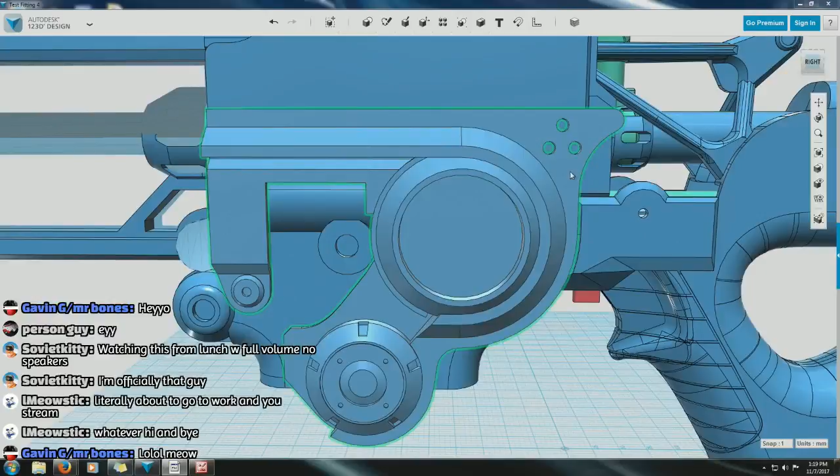If you can tell, I got the thing going in this area-ish, because I forgot that last time. Literally about to go to work and you stream. My bad. Oops. It's currently in the way.

None at all. Middle of dining hall too. Hey everyone! Take a look at Kyle! Everybody look at Kyle! Everybody! Look! Look over here! Hey! This guy on the phone! Hey! Look! Hey! Look over here!

That help at all? So we got some things on the agenda that I'm meaning to do, along with this front piece that we do need to work on. We need to work on some detail inside here, and I would like to make this part a little bit bigger, because if I hide some of these parts you can see that it's a little bit thin on some of these parts, because this isn't even very thick. It's very easy to get lost in the scale. That's only a mil thick, so I think I want to beef this up just a little bit on the outside to give it a little bit more strength.

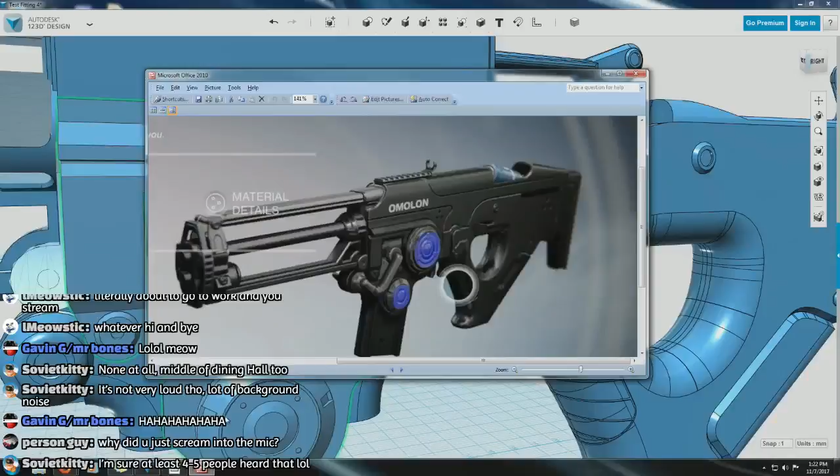But right here, you can see some detail in this, and so I'm just going to use this. Now you can see that it's flush with this ring, just like this one is flush with the ring right here. But I'm going to recess this one a little bit, so that way I can still use it for other things besides Chaos Dogma if I feel like doing that in the future.

Why did I... Oh, that was weird. Sorry, I clicked on something on the other side. I'm sure at least 4 or 5 people heard that.

Yeah, the cover of the Omolon doesn't look great, but if you can see where that cover would go, kind of go over this entire thing and then back here. So that's what I'm looking at. I have the picture on this side of my screen, you guys can't see it, but it doesn't need to be anything super fancy.

But we're going to do it nonetheless. I'm going to try to hide all of this at once, and it might crash my computer. It might actually crash. Trying to hide this many things at once. Wow, look at all that lag.

Oh, my lag. Oh, we're getting to the... I might have to start cutting this thing in half to keep working on it. Oh, you know what? I can't do multiple types at once. It has to be all solids or all sketches in order to have the menu pop up. Or maybe not.

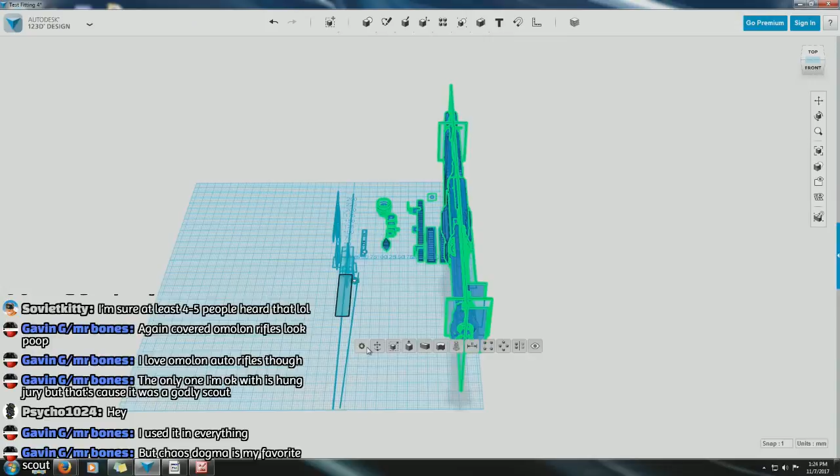Is it going to crash? Oh no, it just hid those. Okay, well that's convenient. Let's go ahead and start hiding some of this crap that we don't need. Give us a little bit better performance maybe.

If I could grab this.

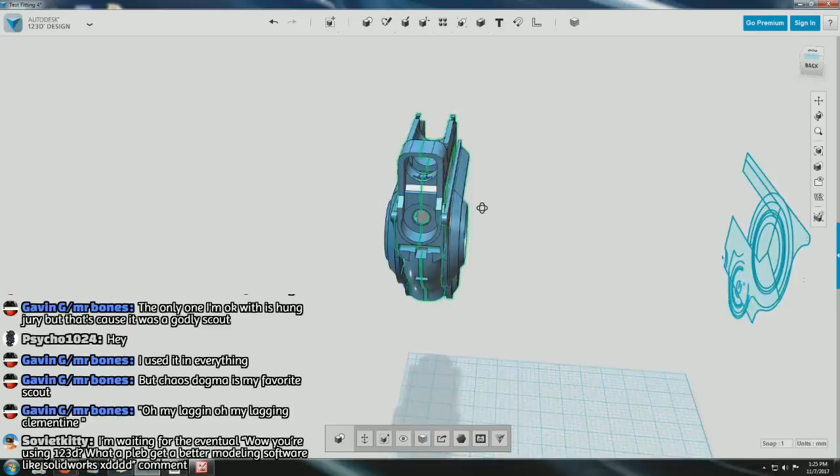Just gonna hide as much of this as I can, so it's going to help with lag just a little bit. It's still there, so it's not perfect, but it's no longer visible, so it's much better than it was.

Now we're going to use this framework, which is the reason why I kept it, so we can easily find the center of this thing right here. I'm not sure how far this is going to go over, but we will measure it. So we'll measure from here to here. 22.2. So grab this again. Move it this way. 22.2. And that should be right on the surface.

Wow, you're using 123 Design. What a pleb? Get better modeling software like SolidWorks. Comment. Yeah.

I do need to get a better software, but I think I can port all this stuff and make it into a step file. But I'm not actually sure. Like, I think I can take this, turn it into an STL, and then import it into one of those programs, and then make it into a step file. I'm hoping, because it would suck to need to do all this again.

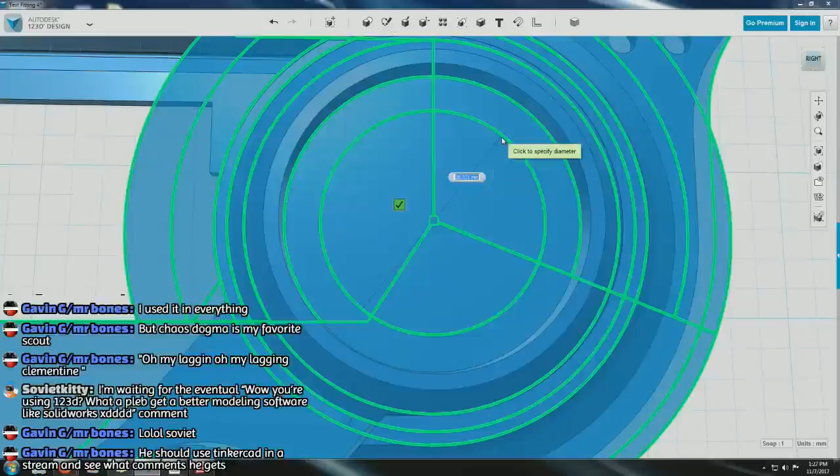Actually, let's make that an actual number. This one is 50 mil. We'll make this one 38. Make the inner one 30. So that's a 4 mil ring.

I think Fusion can convert stuff to step files because the channel uses Fusion 360. I can't totally confirm.

And then it has kind of an inner ring and then a bulb on the inside of here. I'd say that's a little bit thinner. So we'll go 26.

Can you save as a... I can save as an STL. I don't know what an STL PRT is. I've never heard of anything with that many letters on the end. I'm pretty sure you can convert an STL into a step file, because I looked up how to convert it, and there's a bunch of different tutorials of how to transfer STL to a step. So I'm hoping that that would work, but...

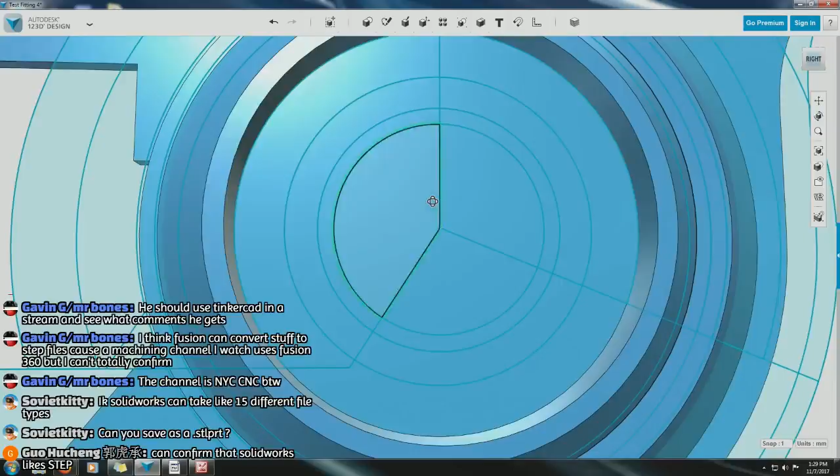I'll do 18 on this one. And then we need a triangle here, and I can cheat by getting my triangle. Actually, I don't even need a triangle. I was gonna do all that, but I only need to make one of them, and then I can rotate it. So never mind, I should need to make one up here.

So we'll make another ring that goes 46 mil out. And something like this. Did it just take a shit? Should I have saved? Okay, let's save.

Hey, Pete, what's going on, man?

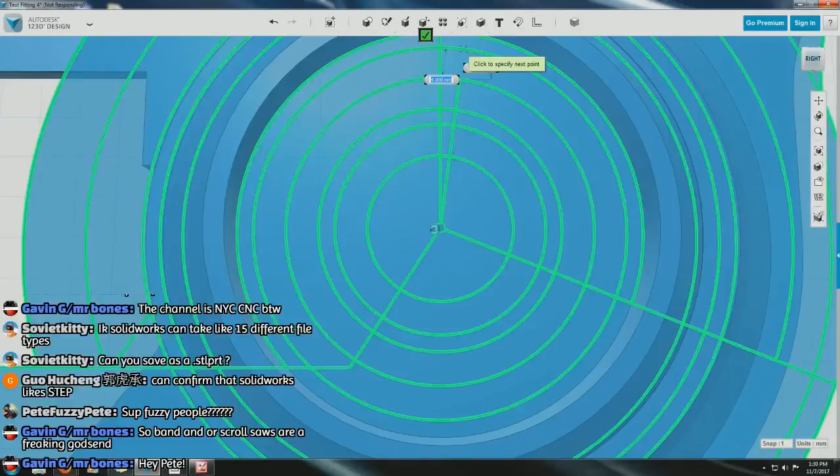So we have a lot of lines here, and it's starting to get a little confusing to the point where I actually missed. But we shall sort through it as much as we can. Wow, why is it so laggy? I would think with how many things I hid, it would be performing a little bit better, but I might be starting to stretch the program a little bit thin. I might have to start removing some things.

So let's go ahead and do this. We will save this. And then we'll save a copy. Should probably move this over here. And we'll just save this to test fitting 5. So now you notice up here that this will change. Is now a completely different document. So now instead of hiding all of this stuff, I'm actually going to full on remove it.

And we'll focus on the front section for this. Trying to think how I'm going to... I was gonna show the sketches, but I'll just leave sketches for now. That's okay. This should not still be here.

I'm starting to get worried, guys. Starting to dip in performance. Hardly working. It could also be the fact that I'm running like 3 or 4 other labor-intensive programs on my other monitor. It could very well be an issue.

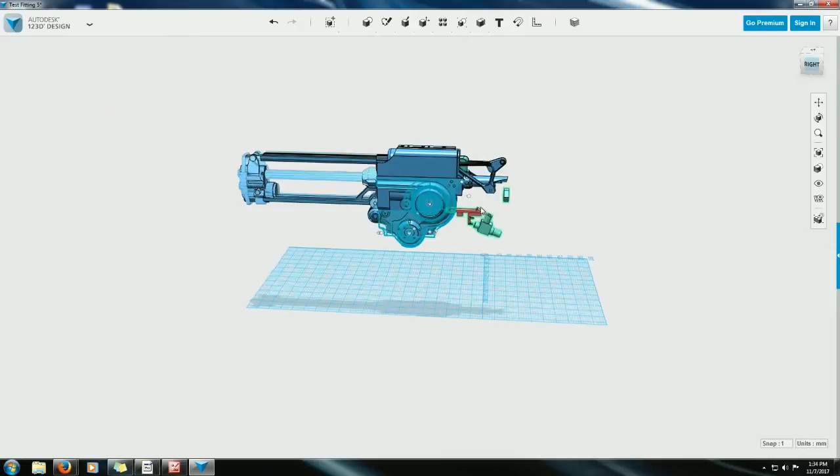See how when I'm grabbing this, all of these lines are disappearing? That's not good. That means it's starting to stretch the boundaries of what this program can do. Now I know for a fact if I delete too many of these things at one time, it will crash. I know for a fact. So we'll only grab a few at a time, and hopefully nothing will die.

Gonna go take it nice and slow. I bet these sketches are the thing that's making my program lag. I bet it's not even the solids.

Okay, we're on a new program here, so we should be good to save. I'm just paranoid. Okay.

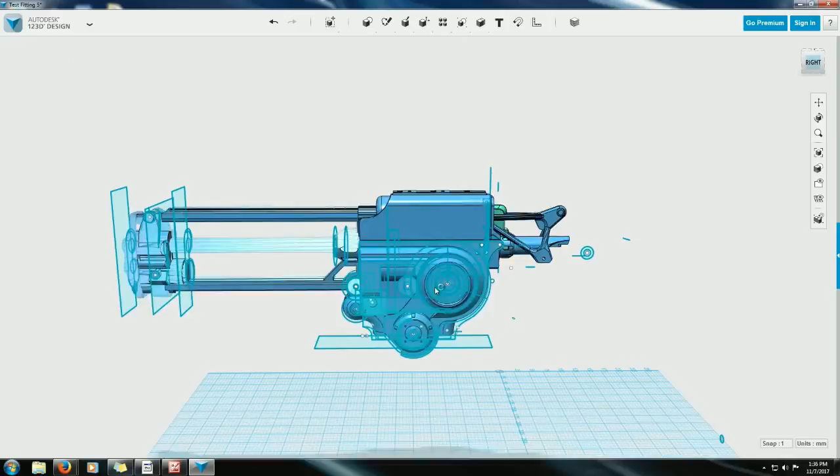That's what I'm trying to do, Gavin. Just trying to imagine this when it's done.

Let's go ahead and move this a ways. 100, okay, that's 100 millimeters is not as much as I thought that was going to be. Let's move that a little bit further than that.

Yes, no, maybe. Come on, freaking lag is unreal. Why is it lagging so much? It should not be lagging this much.

Let's do an even 500. Then we'll come back in here, grab all of this except for that one right here. And then grabby, and the menu pops up, hide, and that should keep the solids there.

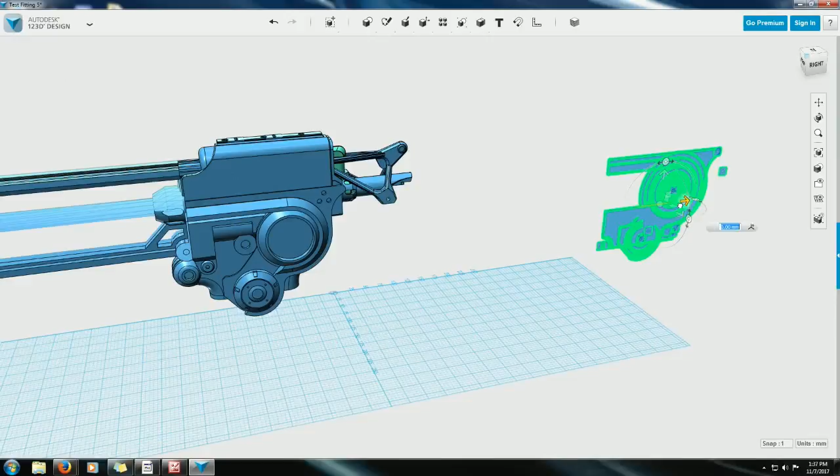And it's still kind of lagging. That's concerning. It is mildly concerning, that's mildly concerning that that's still lagging that much. I hope I don't have some sort of artifact. That should not be lagging as much as it is.

Okay, back to it, let's try to focus on what we're doing. So we're going to trim some of this stuff that we don't need, just to kind of clean everything up.

Still need those. Say 5 mil, that's way too much.

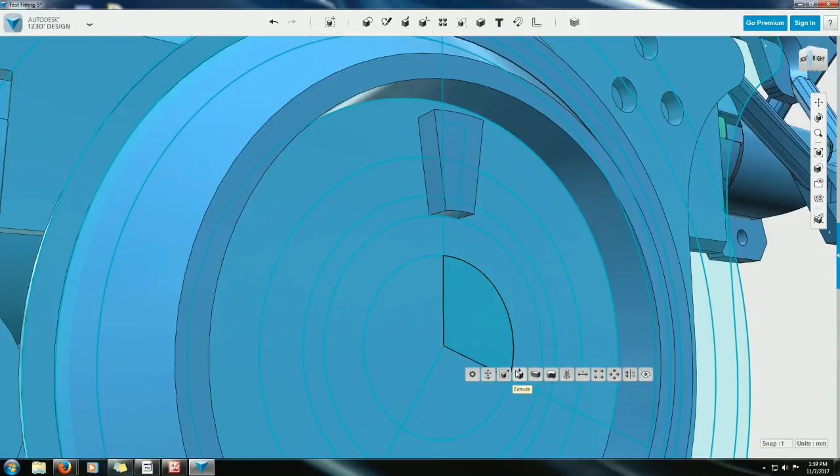And we're going to mirror this object. And then we will take one of these, extrude it, make it a new object. This one doesn't matter as long as it's connected to the center. Oh, I'm an idiot. And then make an axis right here.

Delete this. Circle pattern of this, rotate around this axis, and bam, we have 3 perfectly placed triangles. Or 3 perfectly placed things in triangle form. So that's going to take care of that.

And then we have this ring. Phase inside of here, so I can grab this and that. And pull that out 2 mil. Does that look about right?

Yeah. And then just for workability's sake, we'll make that a new solid. And then we have this ring right here. It's gonna pop out a little bit for...

Oh my dear lord, it just crashed again. I don't know if I'm here or there or anywhere. Nope, this one actually crashed. I'm actually gonna lose my freaking brain.

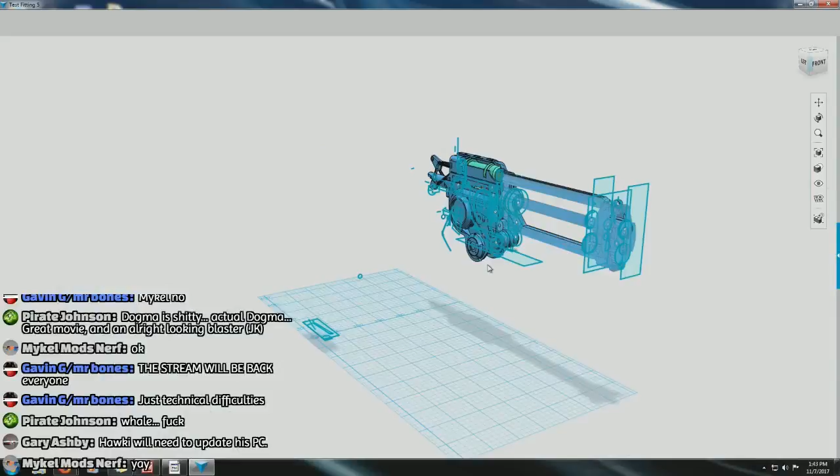Okay, are we back? I'm going to freaking lose my freaking brain. I am going to lose my absolute mind.

It's not my PC, Gary. It's NVIDIA's drivers, there's absolutely nothing I can do. I've tried to fix them. NVIDIA's drivers keep crashing, and while they keep crashing, unfortunately, it crashes my program.

Now we're gonna have to do all of that freaking again. So what did I do?

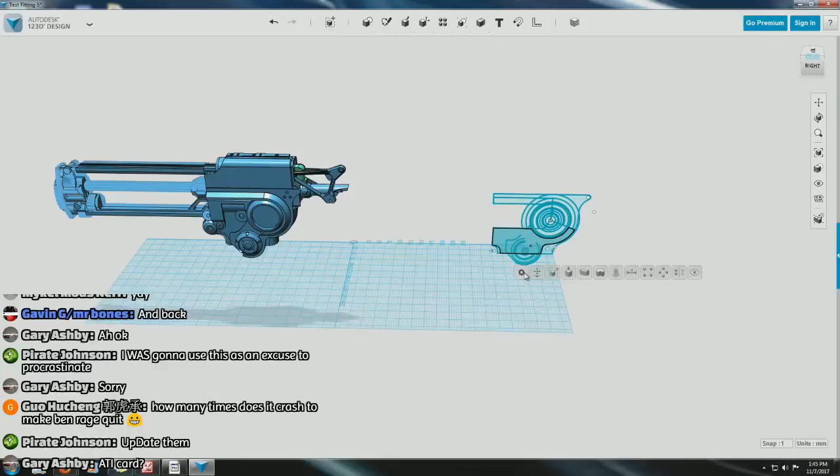This thing is gonna drive me nuts, man. This is just ridiculous. I might not be able to live stream these for the sake of it keeps crashing my driver. We'll see how this goes.

Look at this lag, like I've never had this type of lag with this program before. Like, it's laggy, sure, especially when it gets to the higher polygons, but for how much stuff I've deleted, it should not be this laggy. It should not be nearly this bad.

Save every 5 seconds. They are updated, Johnson. Should freaking unupdate the drivers. Whatever, for now we'll just have to deal with Rage Quit Ben.

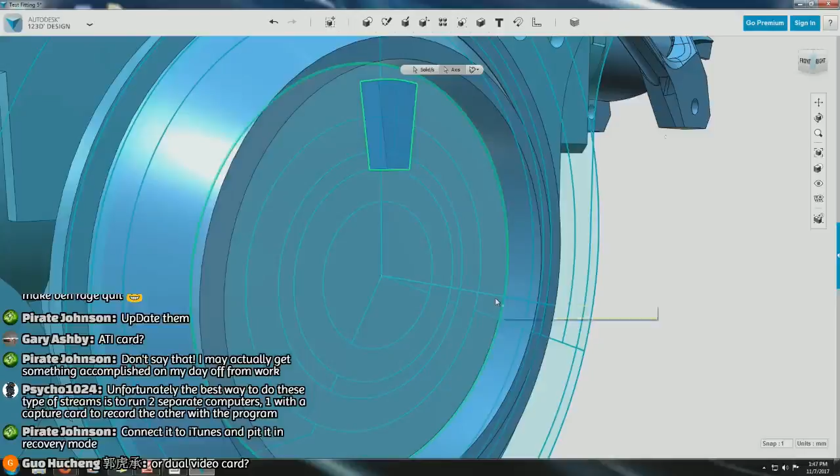New solid. Axis again. Sorry you guys have to watch this whole stream twice apparently. Why is it selecting that?

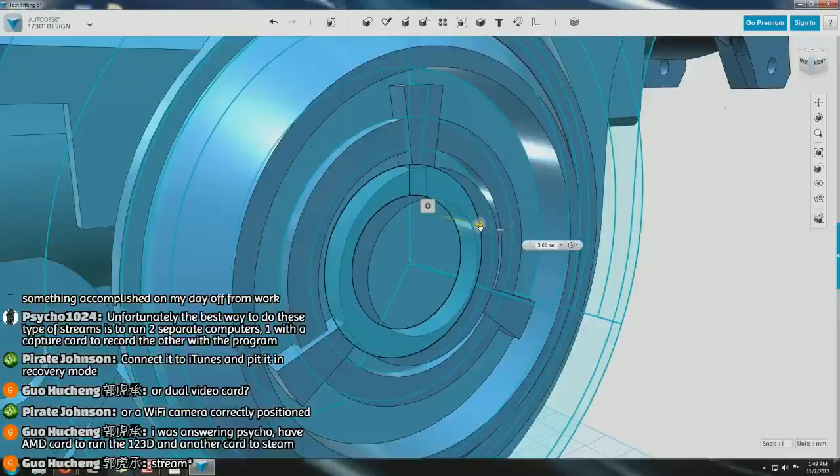Comes out 2mm, and we're going to make that a new solid.

And I'm not getting another freaking graphics card when I could just get the actual program for cheaper.

I don't think we determined how much I'm going to pull this out, actually. This one comes out a little bit more. Maybe like 4mm. Well, yeah. I'll do that, yeah, that works.

Oh, you're answering him, okay. I want to drop the whole thing, get a better thing.

Did I make that a same solid, or did I make that a new solid? I made that a new one, didn't I? Did that make a freaking line? Ugh! How much was that, 4mm?

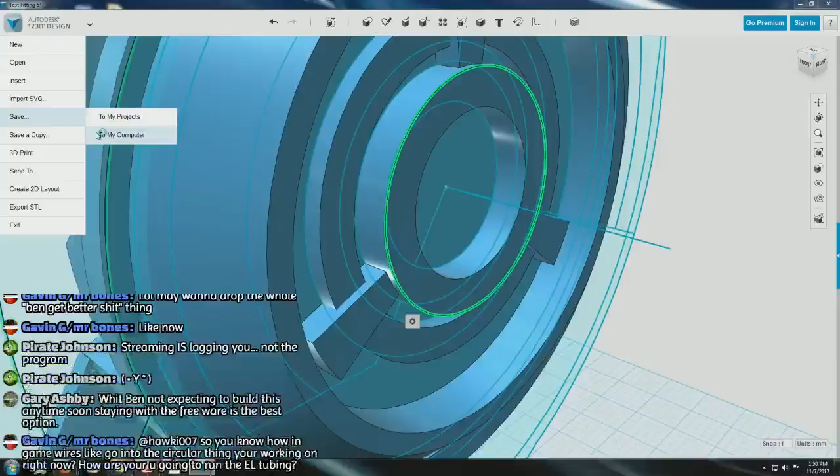See, this should not be lagging right now, not in the slightest. I have nothing on the freaking screen. That's what's pissing me off.

Okay, so we need a bevel right here. Save that first. And that looks about good.

Not sure if this is actually going to come out the way I want it to. No, didn't think so. How am I going to do this? I guess I could just put a bevel on all of these, like that.

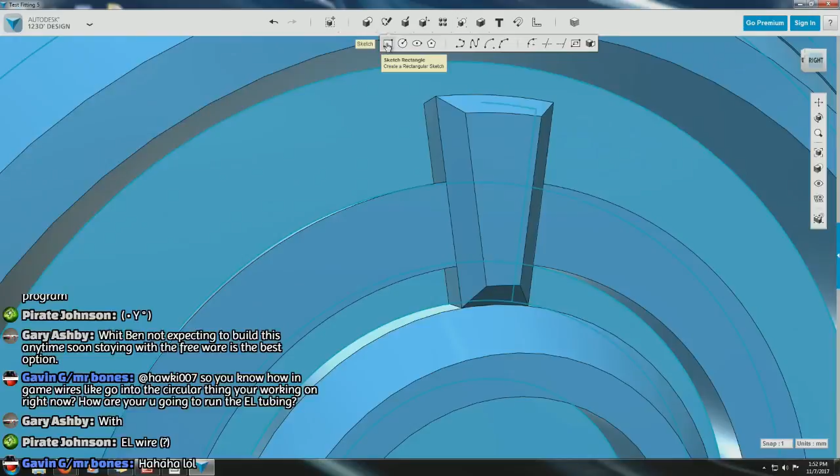Behind the game wires, go into the circular thing we're working on. How are you going to run EL wire tubing? I'm literally going to drill holes in the side of this thing. Because that's going to be something better suited to figure out in real life, so I'm just going to drill holes in the side of this thing when I feed the EL wire through.

How do I want to do this?

Yes? No? Maybe? Really? Oh, I swear to God, if it crashes again, I quit. Okay, why was it looking like it just froze there for a second? Okay. Whatever, whatever, I'm just gonna freaking...

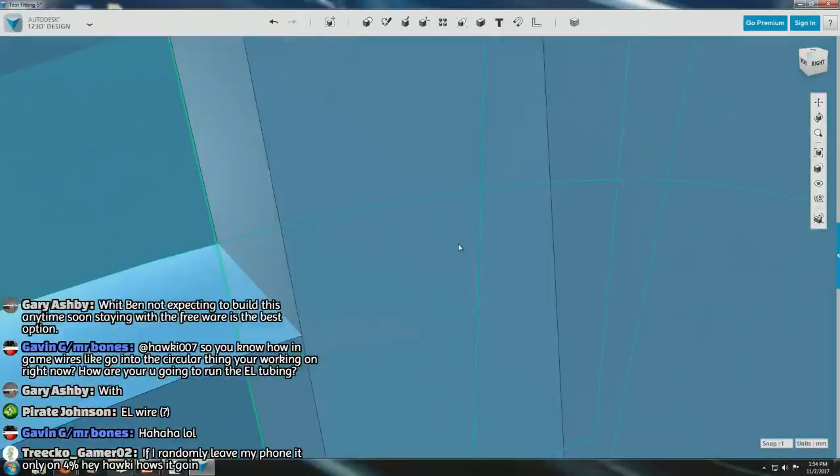Let's... I guess it doesn't really matter. We'll just do 1.75 by 4. So let's do 5.

Oh my lord, I don't know how much more patience I can have for this. Okay, that's too wide. I don't know how much more I can take this. This is stupid, it's pissing me off how much this is lagging.

It's 5. We'll just do 1.

What? Oh, I grabbed the wrong piece. It's like, what's going on? I'll just bring this forward 3 mil.

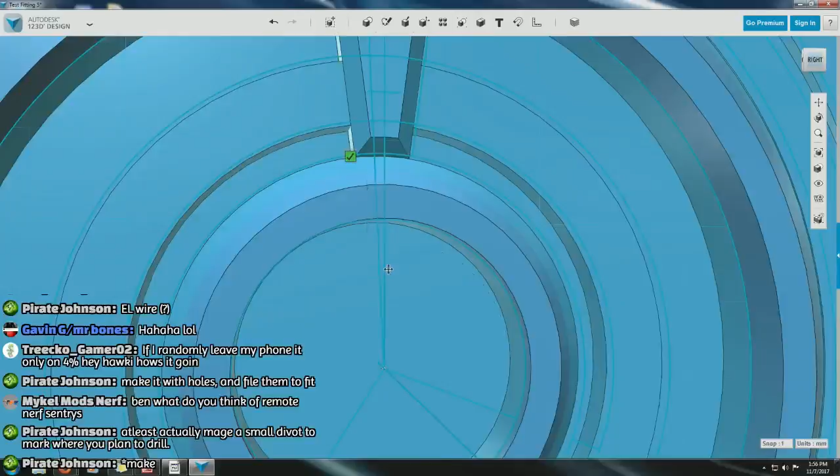We'll do 4 mil here. So we'll go 4 by 2. Do I want that straight on, or do I want it actually to the center? I think I want it to the center.

What do you think of remote nerf sentries? I mean, complicated. I don't know if I've ever seen a really nice one. They're all kind of like, you know, tinker with them, but not really have any real applications, you know what I mean?

At least make a small divot to mark where you plan to drill. Oh, divot. No, like, I don't know where these wires are going to go until I actually start, so there's no point.

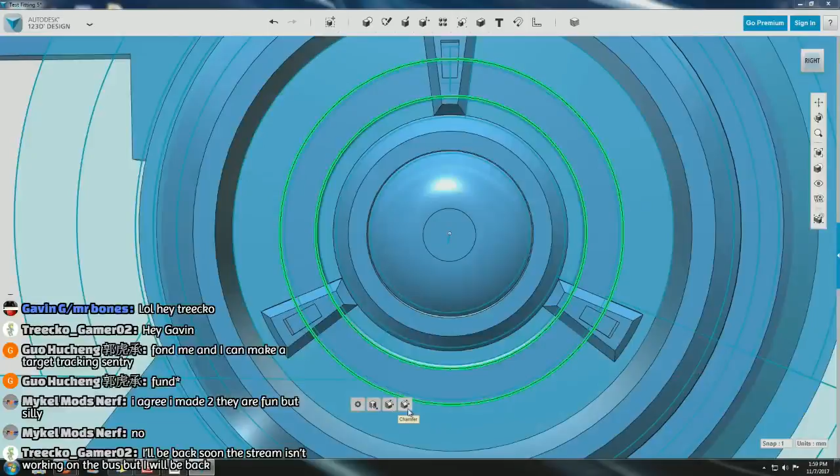Whoa, whoa. Now we can duplicate this.

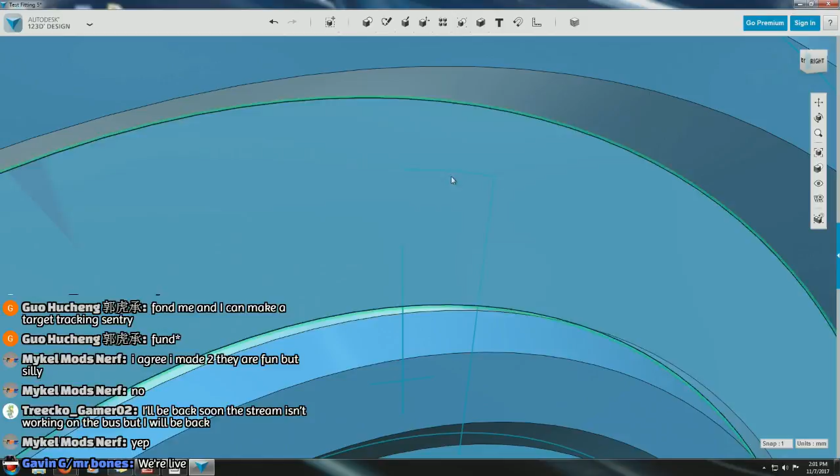I don't suppose I can reload just this. No, it's alright, I don't need to see.

So, yeah, this is going to be a chore.

Let's see. I want to do... what do I want to do? What do I want to do? Let's get rid of that. Go all the way up, I think.

Should not have done this. What I'm gonna do is, from the bottom here, measure out 2 mil.

Nope. Well, 1.5, that's good. And then we'll drag it down so that we make contact here.

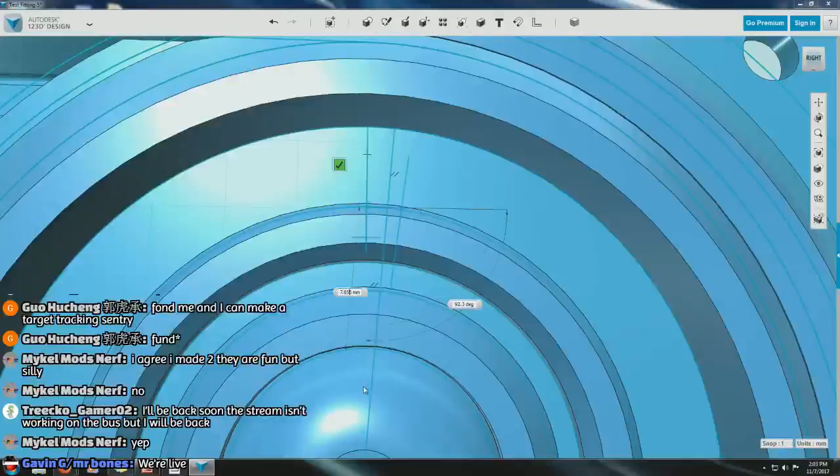Let's back up and take a look. You'll see what I'm doing in a sec. Yeah, that's a little thicker than I want. That should have auto-corrected to the middle.

That's better. So now we're going to stress the absolute crud out of our machine here. Extend that 2 mil and accidentally make it a part of the same thing. Extend this more than 2 mil. If I can find the right tool, extend this 2 mil and then make it a new solid. Grab the block and move it back 1 mil so it's 1 millimeter sunk in there.

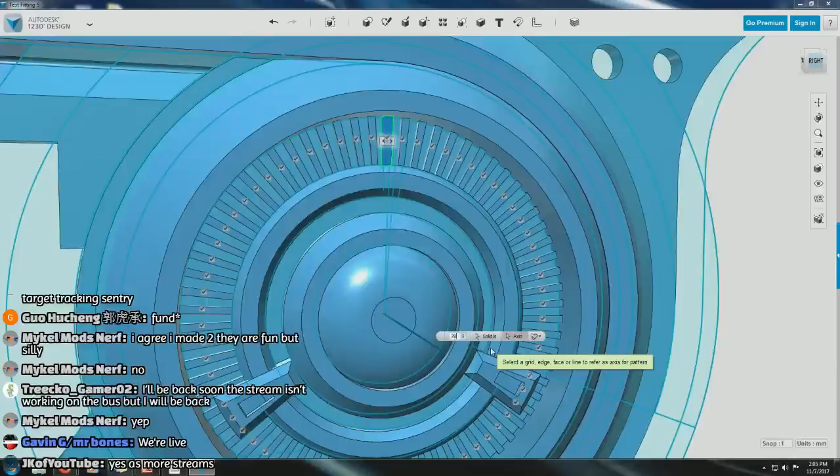Now we're going to save it because this is inevitably going to crash 74,000 times before I'm able to accomplish my task. Instead of 3 times, we're going to try, let's say, 20... up to 80. That looks about right. Oh, please don't kill me. Okay.

Now I have the unfortunate task of needing to cut out every single one of these. So let's go ahead and hide these objects because I don't need any more distractions than I already have. I believe that is all that I wanted to accomplish, so I'm going to go ahead and hide the sketch. We'll just leave that. Now I need to save, so I don't have to do that all again.

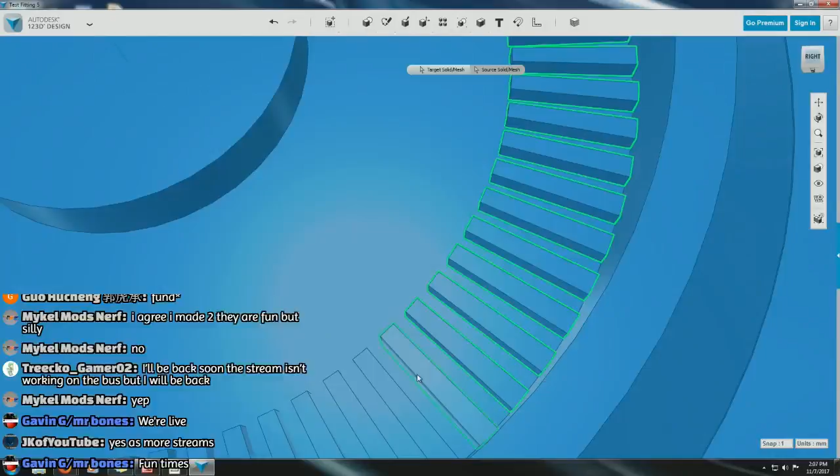And now I need to subtract, and click on every single one of these 80 vents. We're going to be here a minute, guys. And if I miss, I might have to start over again.

Just about halfway done. I wonder if this is going to crash.

Enter. Quick, save it.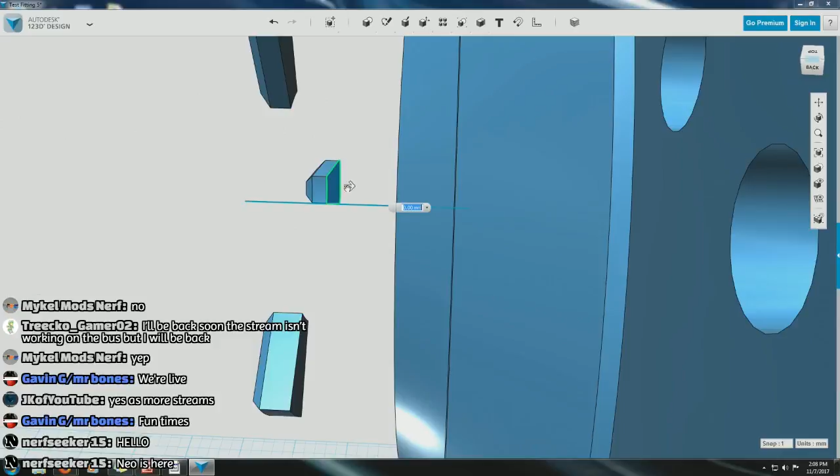I'm gonna grab these. Move them up just a little bit. And then extrude them backwards by 1 millimeter so it fills in the vent behind it. Otherwise there's going to be an empty space behind here, and that can lead to issues.

Move them back 18 millimeters. And then that should, see how that's now filling in back here? It's just what we want.

Okay, now I think we're good to merge all that together. Let's go ahead and save it one more time. Before we do anything, save, save, save, because crash, crash, crash.

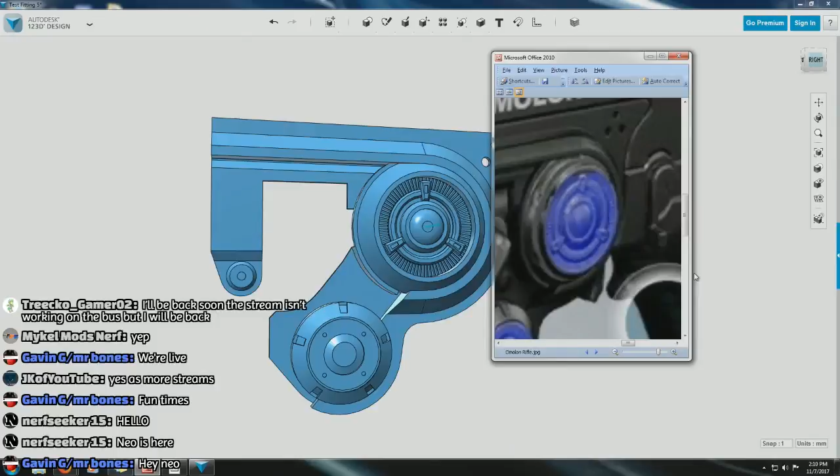And that's all one piece. And that makes that a little bit more interesting to look at. Whoops, forgot this was here. What?

So we have this piece, and that's my rendition of that. What do you guys think? Is it close enough? Then we got this lower one here that I've already done.

Stretch a little bit. And of course, in the video game, all of this is just flat, and then they just paste the texture on there, which is why I have to go in and manually make all this stuff.

That looks pretty snazzy. Pretty happy with that. And so for Chaos Dogma, I'll just blacken all of this and kind of weather it a little bit, junk it up a little bit, but this leaves it flexible enough where if I want to make something else, I still have the correct pattern in there.

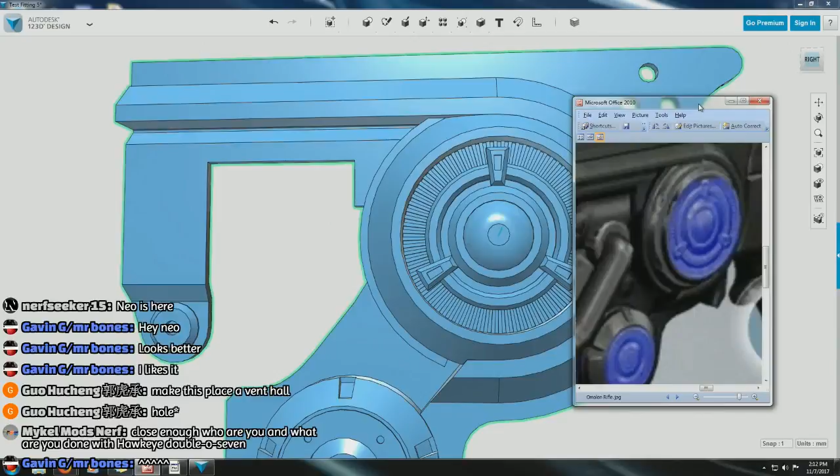Make this place a vent hole? What? Close enough. Who are you and what have you done with Hawkeye 007? Oh, close enough. I mean, that's pretty damn close. Right?

Maybe bevel on the inside of here now that I'm looking at the design. I think I want to take some liberties and bevel on the inside of here. Nah, screw it, it's going to take too much work. I'm going to have to do it to all of them because I already pasted them all in there. Screw it. Screw that and screw you.

So now, hide this piece. We're going to straight up delete this piece. Delete. And then we will save and mirror this side, and we'll use this plane. And we've got two. Look at that. That was easy.

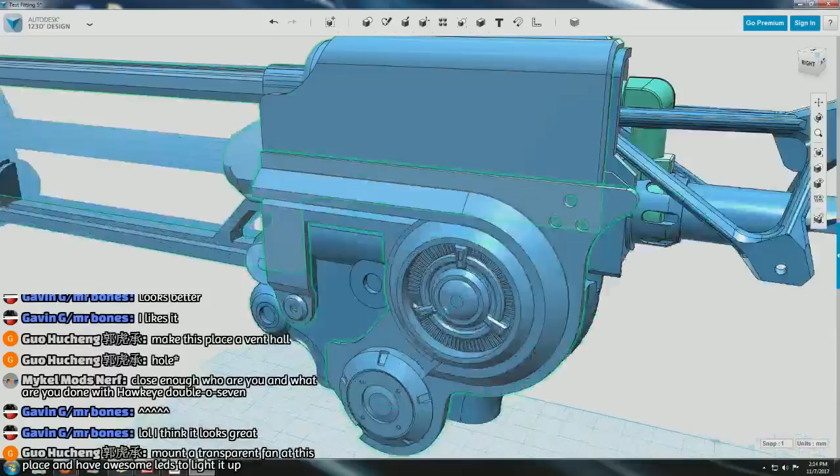Really wish this thing would screw off. And I think we're good for now on there. So I need to beef up this, which I might do next. Mount a transparent fan on this place and have awesome LEDs to light it up.

Why is it in, oh, because there's a little thing right there. Let's just delete this. Don't feel like dealing with it.

So, we need to beef up this part a little bit. Get some meat on the bones. Shouldn't be too difficult, we'll just grab some of these. Well, first of all, we need to delete one side of this because it's exactly the same. So we'll just delete that and then duplicate it again when we need to.

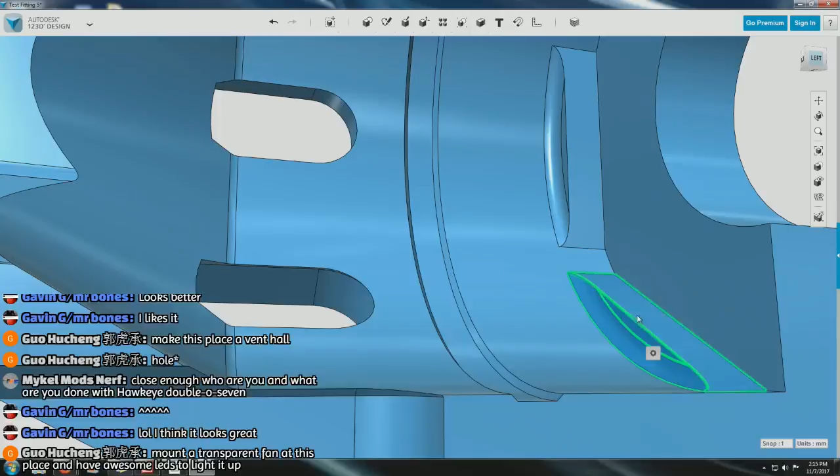Grab that. And now we literally have thicker walls. These should be about 2.5 mil now. It's about 2.5.

And we will open up some of these because this is bound to not be super 100% precise exact down to the exact millimeter. That's just bound to happen. So we'll grab all of the inside walls. I doubt this is going to go our first run. It's going to be like, I can't do this, which I'm totally expecting, but might as well try.

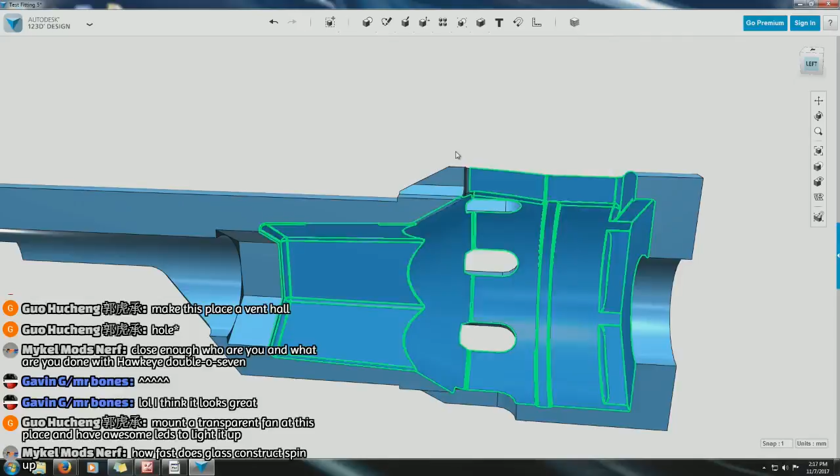Just grabbing. Oops.

Again, seriously doubt... yeah, it didn't even work. Oh, why is it 175? Yeah, I didn't think that was gonna let me do that. It's not gonna let me do that at all. Forgot right here, but I don't think that would have made a difference.

How fast does glass construct spin up? I mean, it has 180, so... as fast as 180s.

How am I gonna do this? Gotta think a little bit here. Where's my actual... hold on, let me get my actual part. I'll be right back.

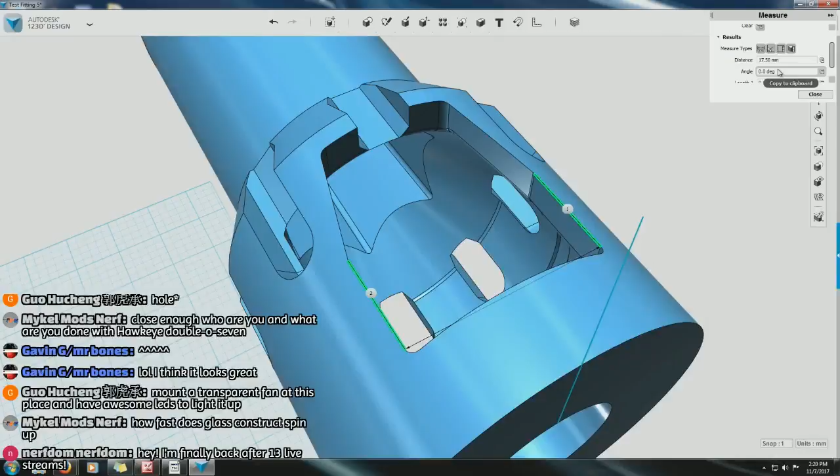Let's go ahead and make a line right here. We'll duplicate. And then measure, measure here to here.

1750, what did I say that was? 17.6, that's what this is looking like. See, that's what I'm worried about. Then again, I could also file these parts to fit and kind of sand them down. Oh, what a predicament.

This is a small enough piece where I guess I could just print this from Shapeways or something. I guess it's not that big of a deal.

So we made that line there because that was going to fuse the parts together, and we'll split these up using that. At the very least, we beefed it up a little bit.

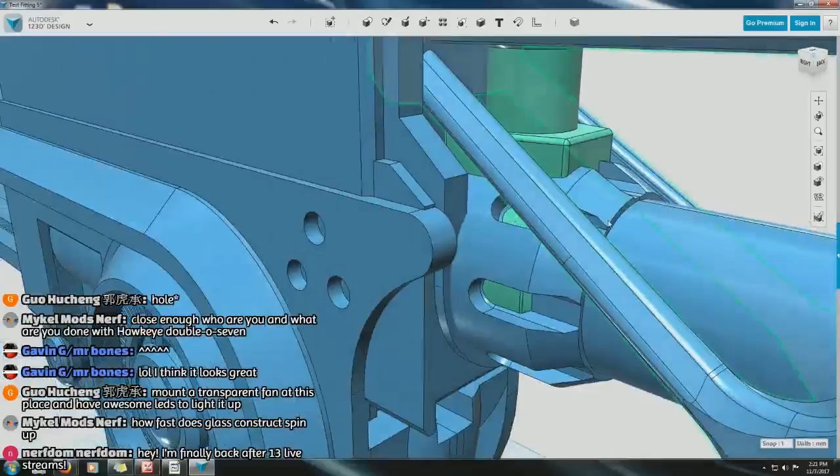The hell's that? What is that line? Right here. Wait, what? Oh, that's the other piece. I thought I deleted that. Apparently I just hid it. Okay, that was a little confusing. Okay, that was very confusing for a second.

So we'll duplicate these, copy, paste, and then subtract, and subtract. Now those parts fit in there.

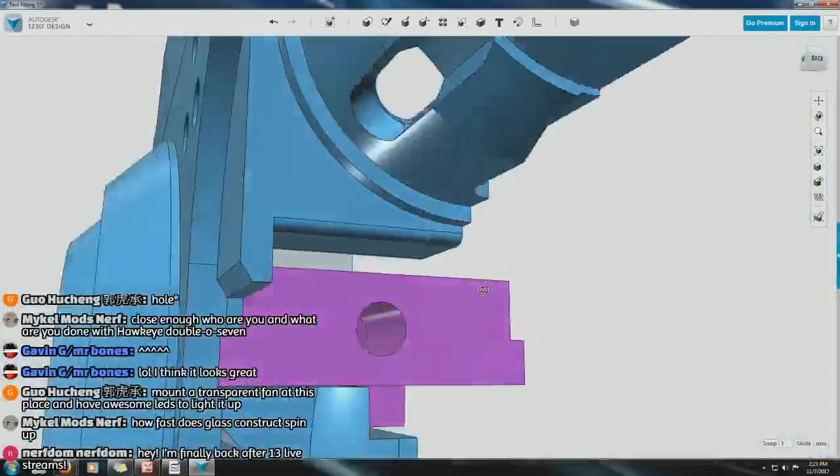Ah, shit. It's a little thin right there. Oh, it's still a millimeter. That's alright.

We'll eventually have to import this into the other model and delete the front, and get this part to make sure it's fitting on the other side, but we'll do that all in good time.

So yeah, this is where the mag would go. That is where the trigger goes.

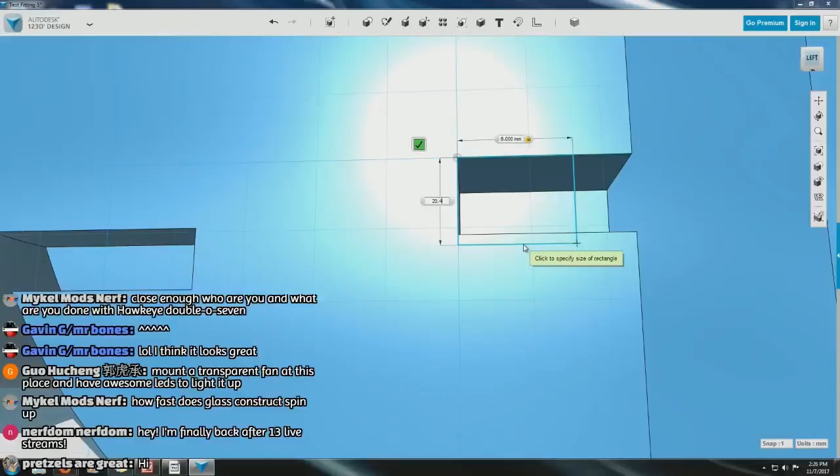Now we'll measure this and see if we can't replicate it. Where do we want to start? Guess we'll start here, if it would let me.

So I'm just going to be going back and forth with a pair of calipers and measuring this back and forth here. So that's 8 mil. And this way is 20.4.

So already I should move this over a little bit. I mean, I guess I need to fine adjust it afterwards anyway, so there's no point in doing that.

You know what, this is actually upside down. I just realized that that's upside down. I wonder if I could use this upside down. Oh no, wait, because no, that doesn't work. So it'd be going like this.

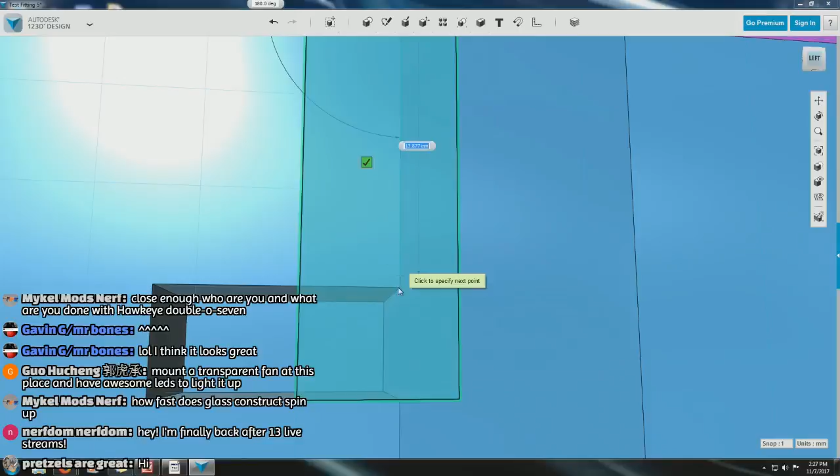So this wall right here is 30.6, or whoa, 30.6? 3.6, excuse me.

Wow, did I just get that on the wall? I mean, that's not where it's supposed to be, but...

And then this one is 4.7. So I'll just go all the way down here. And then, oh, we still have this. Then come back up, 4.7. And then, what am I doing?

Sorry, just lost my train of thought.

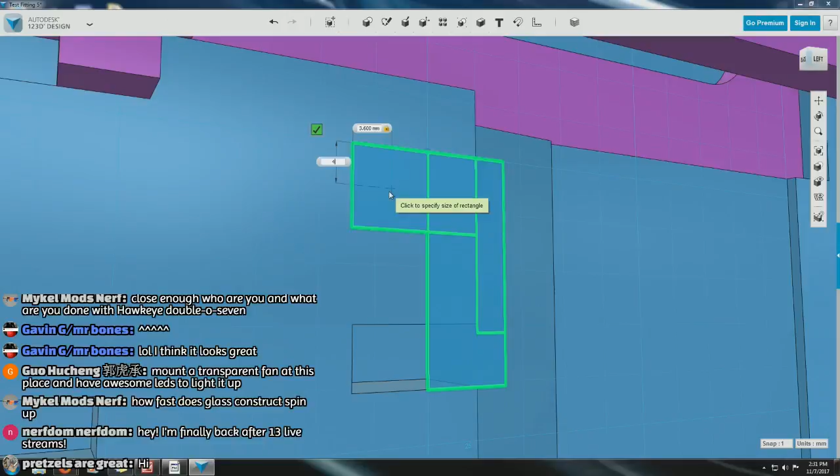So 5.1, that would be less than that. So it'd be 3.6 in this direction. So that would be 3.6.

And then this one, double checking. It's like 3.6, maybe 3.5, or excuse me, 5.5, I'm an idiot. So that'd be 4. That should be where that goes. And this is 3.

Just clean that up a little. Oh, and then I guess we need the thickness. It's about 10 mil.

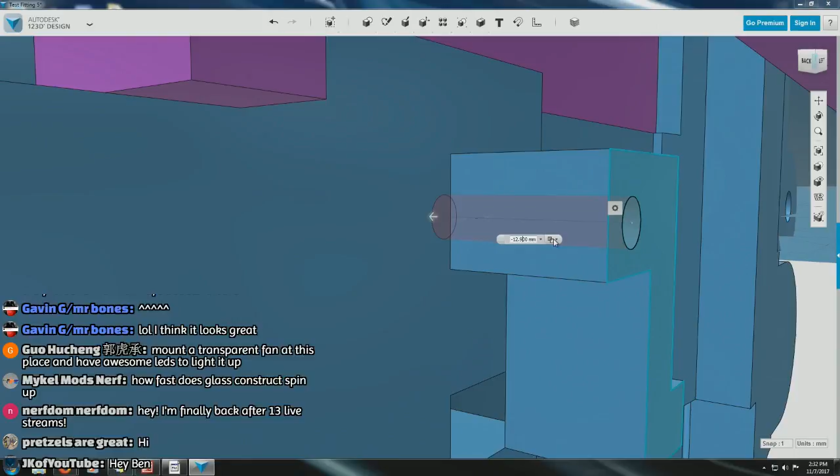What side is this on? Probably figure out what the height is on the peg.

Hey JK, what's going on, man? Kind of a quiet stream. I think people are dead, but that's okay.

So that's 12.9. So here we're going to put 12.9 to a new solid. Gonna go ahead and I think we'll just go ahead and delete that. Merge.

And we'll make this a different color. Let's go with - do we have yellow already? I feel like we have yellow already somewhere. Can't remember, I'll just make it yellow for now. And there's a bit of a slope on the end of this, but I'll just guess that because it's not that important. It's about that.

So that is the approximate space of a Stryfe mag release. So if I was going to use that, where does this even go in the shell? Does it center up?

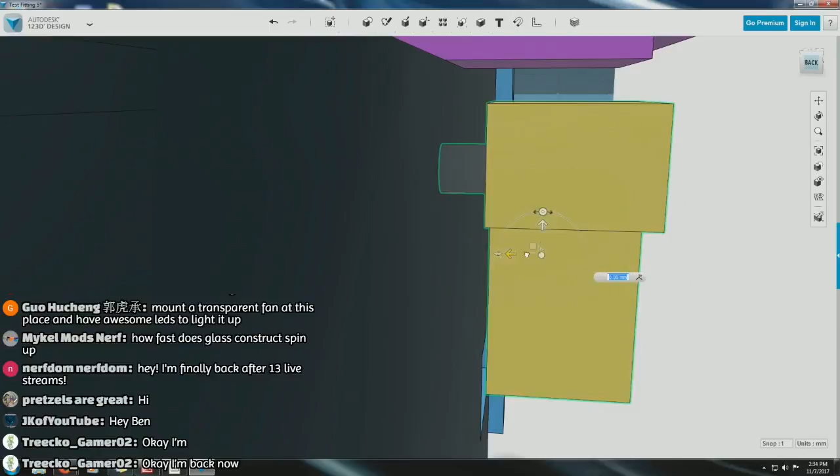I'm not even sure if that centers up. It doesn't actually center, which is interesting. It's kind of with the center of the peg, or center including the peg, which is interesting.

So what's the center of 12.9 divided by 2 will be 6.45. So if we pull this out, um,

2.9, and then we'll push it back in a total of 6.45.

That should be about where we want it. Not center, but that's where it is on the Stryfe. So we're just gonna trust it.

Welcome back, Treecko. I think we're kind of dead here, but that's okay.

How is that even possible? That can't be right, that's not right. I'm missing something. I think I messed up someplace, and I think I know where.

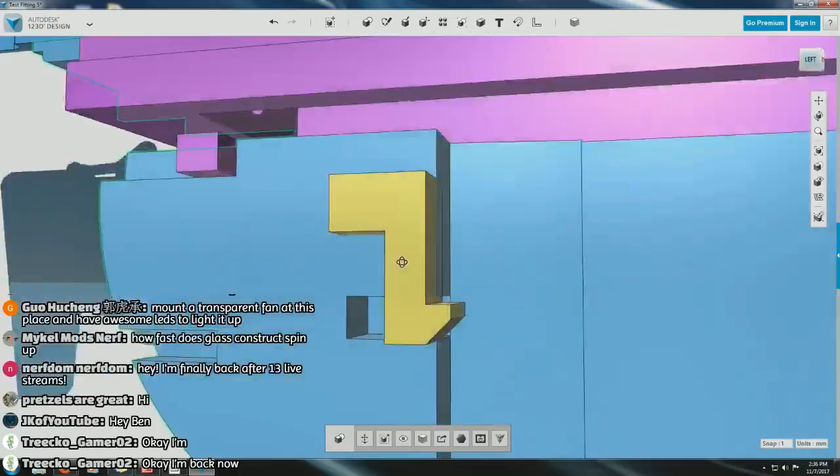Yep, that needs another 1.3 mil added to it. How did I screw that up? Should be 8 mil from front to back there. That is 8 mil, so what the hell? Did I screw up the thickness here?

It's about 3.5. How did I get 5 mil out of that? What the heck? It's like 3.55 actually.

Oh, freaking balls, man, that might not be good. I might have to move this and then extend this because I have the pin right here.

So let's measure this to here. It's 12.1, that's correct. So this was 3.55.

Five, 1.45. Why is there a freaking line there? Why is it still in measuring? Negative 1.45, whoops.

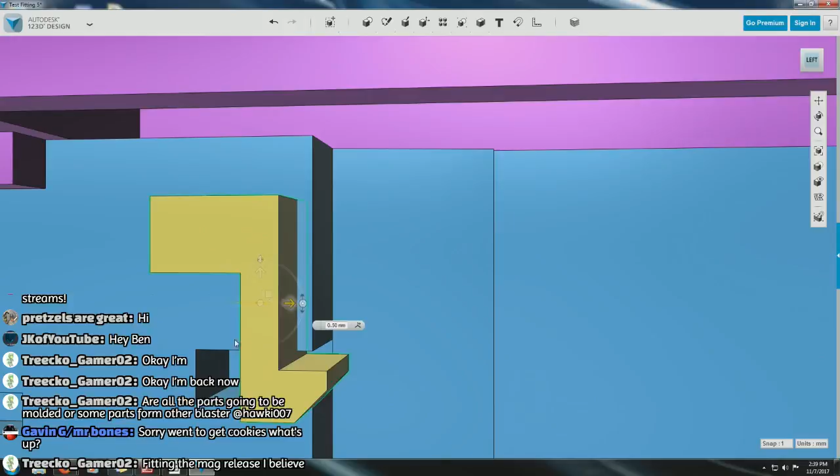That looks much better, that looks much more accurate. How thick is the wall that holds it in is the real question. So opening the Stryfe and actually measuring the wall thickness here. It's like 1.5.

So move that another half mil closer. It's kind of thin, but we'll manage. So that should be the placement of that. It's gonna need a custom mag release for sure, but I guess that was expected. As long as it doesn't interfere with anything.

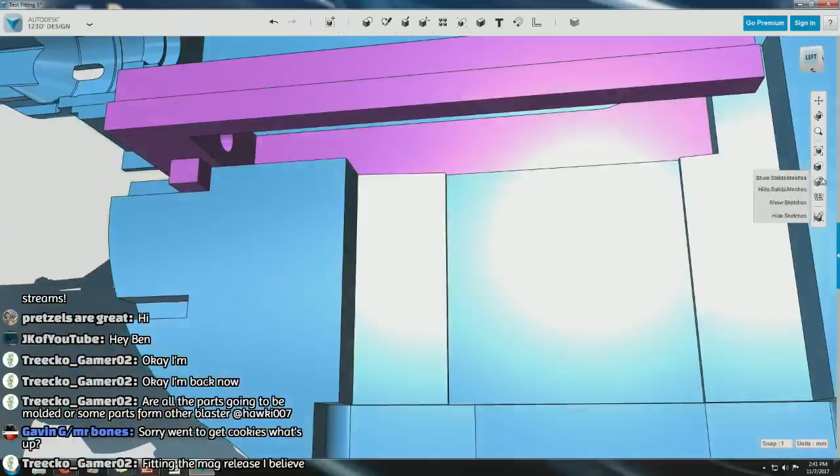That's not good. That might be artifacted. That should be merging together. That's not good.

Hopefully that fixed it.

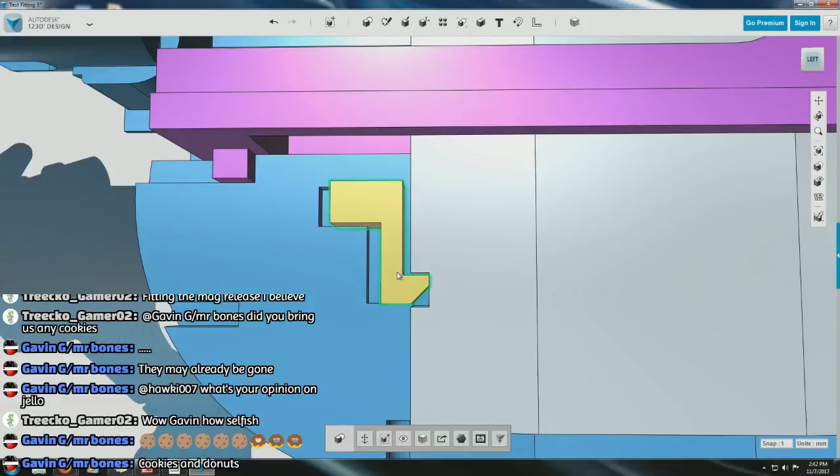Yeah, where are cookies? Wow. Can't believe you didn't bring us cookies. How selfish. Cookies and donuts? Sounds super, super healthy.

Slowly losing the will to live is a fact. That I am slowly losing the will to live.

Wonder how long an artifact, or not an artifact, a Worker mag release is. Probably come down to about here, I would think, like right outside where I need it to be.

Probably gonna have my own printed off of Shapeways.

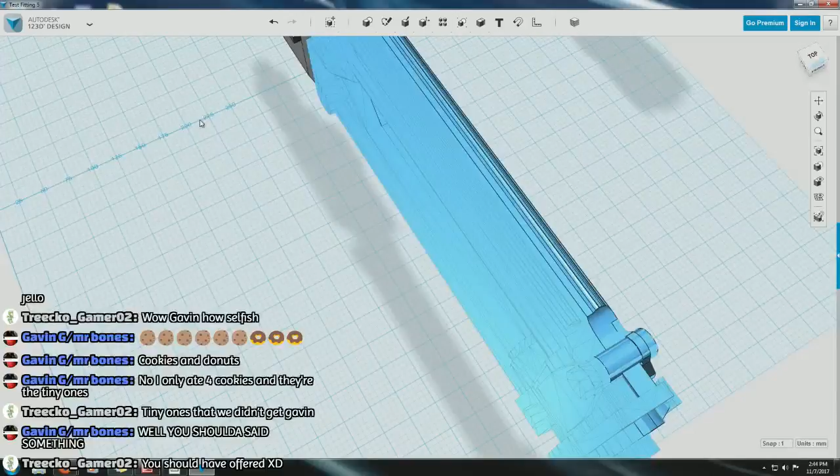Let's start working up here. Okay.

Fine, doesn't want to center up? I'll use something else. Damn.

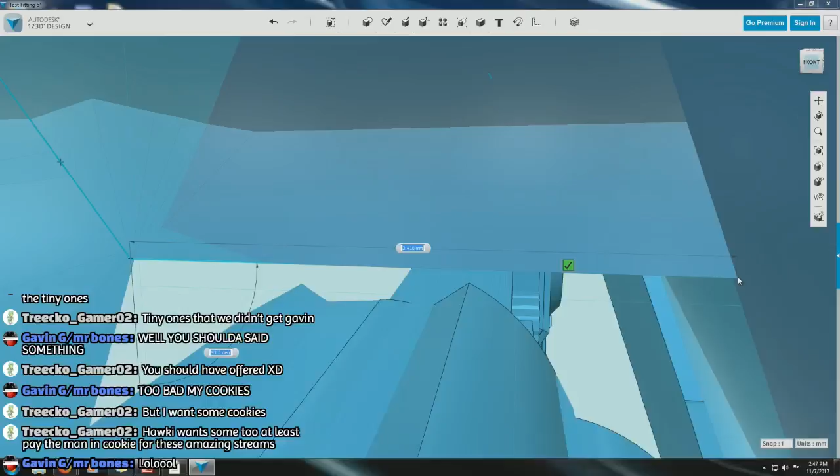Okay, now we have a bit of a guide that we can go off of. Can't see a thing. Where am I? What's going on? That's actually pretty darn close already. See how easy that is? No trouble at all.

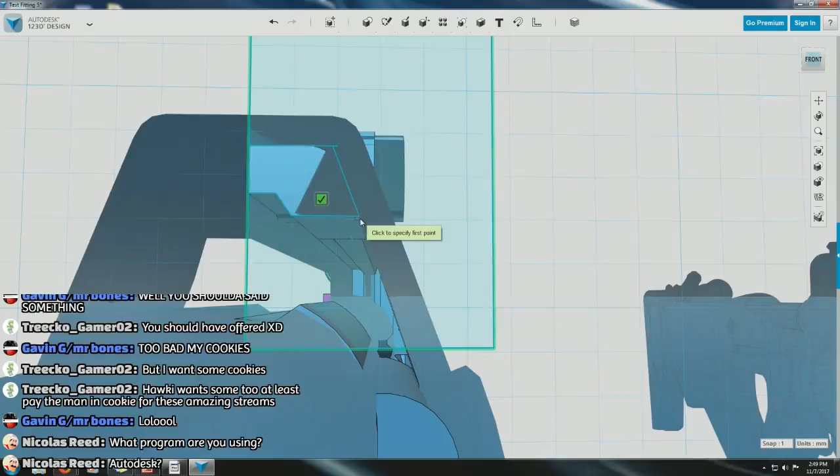This is 123D Design. It's a free program, not very powerful, but it's free, and it's what I have right now. You can tell we're doing a good job because you see that little underhang right here matches up with this thing. So that's good. It's kind of intricate down here, but we're figuring it out.

Just kind of quietly modeling, not really worrying about anything right now, so... Whoops.

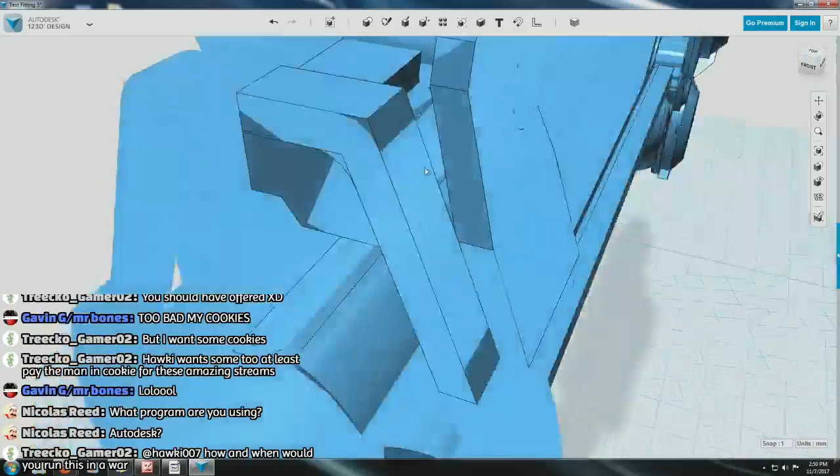How and when would you run this in a war? If I ran it in a war, it would be at an ultra stock event at an NIC grade war. If I ran it.

Screw it, I'm just gonna delete that. Probably gonna regret it later, but whatever. Whoops, didn't mean to do that. I believe that was 4.15.

Look at that, nicely lined up. This is already getting like 250 feet per second, or it's going to get around 250 feet per second with 80 psi. So let's not go up that high.

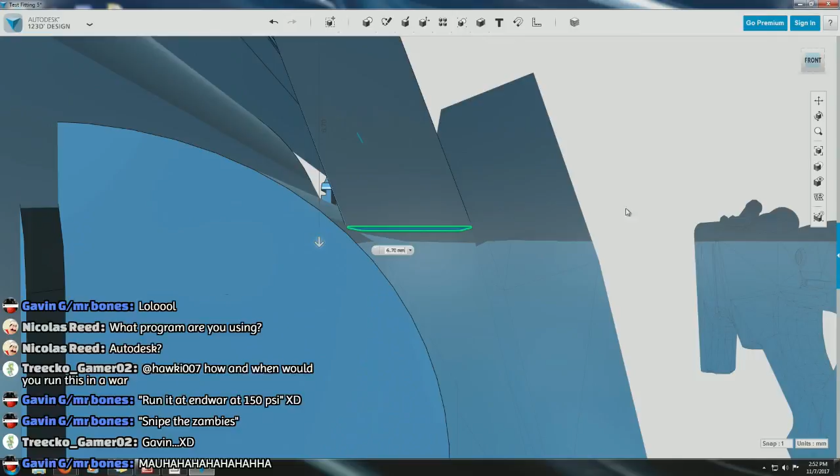This little bit right here can be extruded. Nothing fancy. Oh, it actually changes direction right there. I guess we'll deal with that when we come to it. Well, it doesn't change by much, and it's behind a thing. I don't know if that matters. Probably just keep extruding.

When I merge these two pieces together, I can just fill in right here.

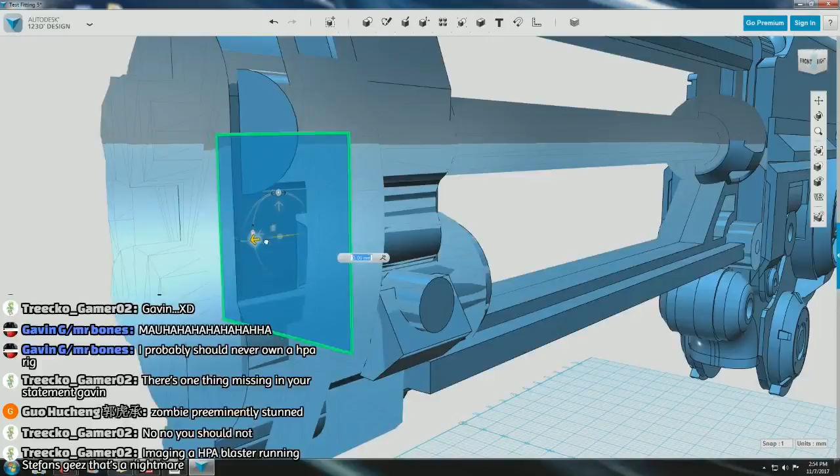Imagining HPA blaster running Stefans geez, that's a nightmare. Yeah, this is gonna be able to run half lengths and full lengths, but I'm most likely just gonna be running it with half lengths. I just figured might as well add the compatibility for both.

I wonder if I can actually duplicate that. Let's see if we can duplicate that. Need to find the center. Whoa, too far. I need to recenter my camera is what I need to do.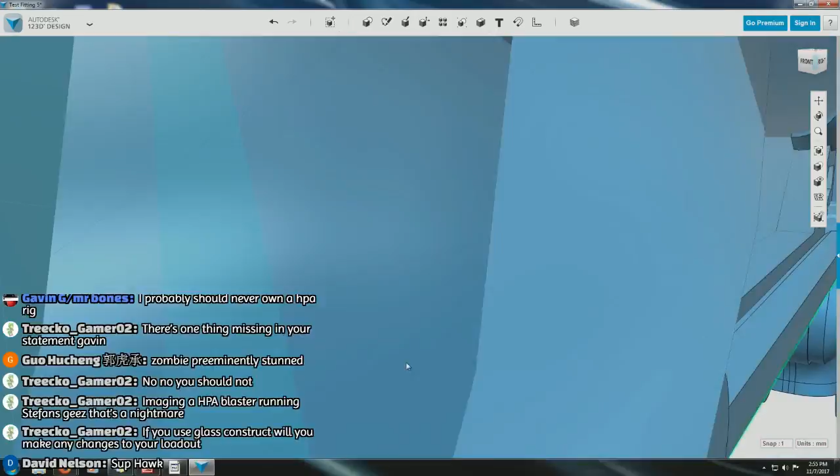Yeah, saw that coming. I need one continuous line going, and then I need to delete these other ones. Delete the big one, that should be fine. Well, I don't know, I really want to delete the smaller one. If I can freaking grab it, that'd be great.

Where the hell did I just put that? Oh, damn it. Freaking damn it.

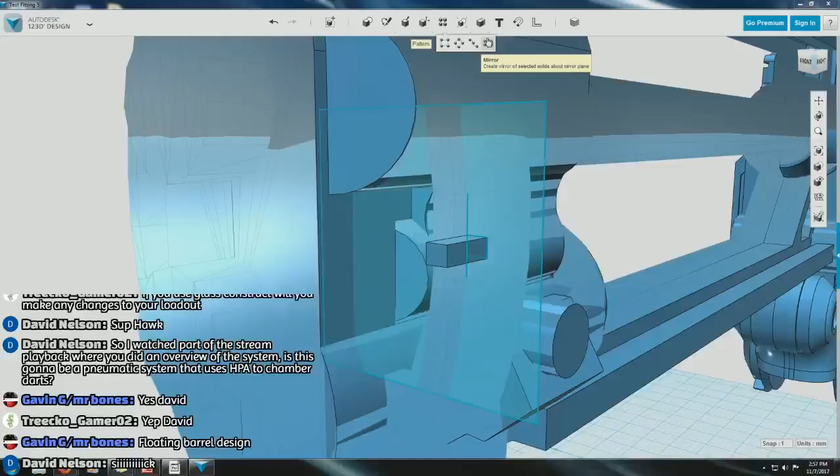Way back when you did the overall system, this is going to be a pneumatic system using HPA to chamber darts. Yep, that's going to be the deal, or at least that's the plan.

Okay, now that we've finally found the approximate center here, we're going to attempt to flip that entire thing and see if we cannot cheat a little bit here and save us a little bit of time. But nothing ever goes correct, so don't hold your breath.

Let's go ahead and mirror flip this piece. Well... well...

Trying to determine if that's going to look better in real life, because that might just end up looking better in real life, because it'd be perfectly symmetrical instead of being half-assed symmetrical, or if I should just redo that bottom part. I'm probably just going to end up redoing it.

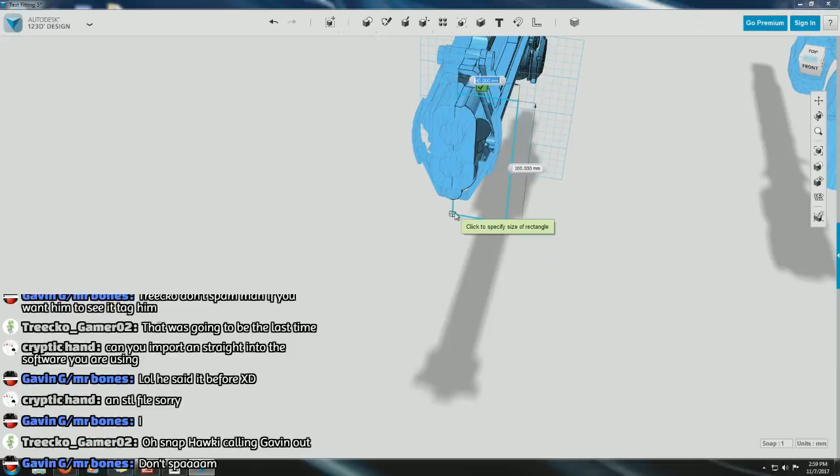Can you import straight into the software you're using? Can you import on what? You're gonna have to reword that. I have no idea what you're talking about there.

No place to go but up.

An STL file. Can you import an STL file straight into the software you're using? Yes, but I can't modify it in this program. I would need to use something more powerful. These light blue ones are all STL files, and I can't modify these at all. I'm using it as a scaffolding, but I need to redo everything anyway, which is why I don't care, because I need to redo everything in here anyway to add all of the details that I'm adding. Because obviously this is not, whoa, this is not rendered in game, so.

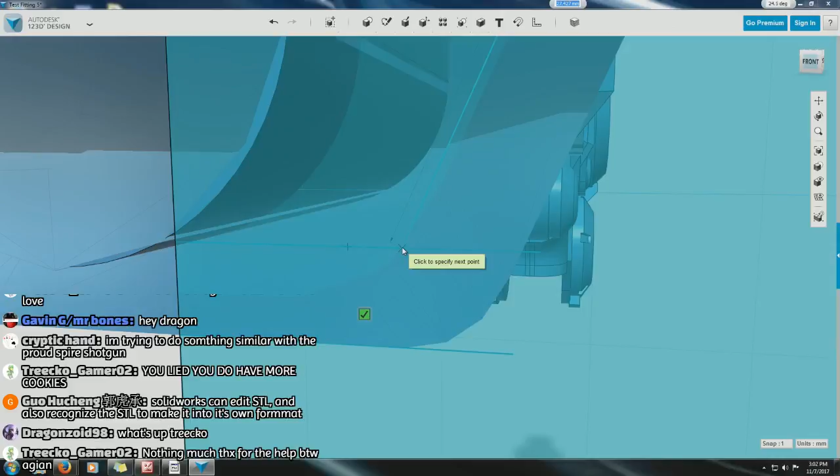SolidWorks can edit STL and also recognize the STL to make it into its own format. Okay, cool, so I can transfer it to something else and something like that. It's good news.

Whoa, a little bit of lag.

Do you want to lock on to here, or what's going on? Could you do me a favor? Good lord, that's not locking on at all. I'm just going to go in a random direction here. Delete this, because I think that's interfering.

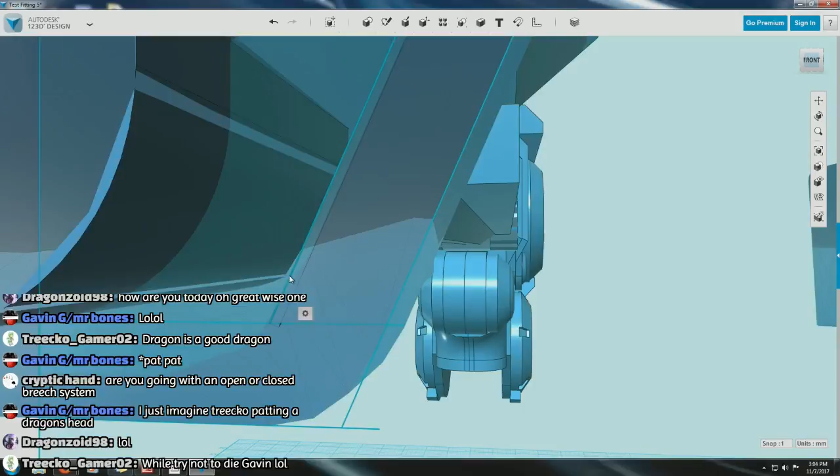Here we go. It's a little off. I feel like I want to redo that.

Are you going with open or closed breech system? Open breech. Open breech floating barrel.

Oh shoot. Need a frame of reference.

Maybe those are just two different shapes, because what's saying right here is parallel. I think those are just two different shapes. I'm just gonna have to make them different angles. It's probably why the other one didn't fit. The upper side.

Trying to pay attention to all the comments. Sorry if I'm missing any. This takes a little bit more of my attention than sanding, so if I miss something, just tag me and I'll try to keep up.

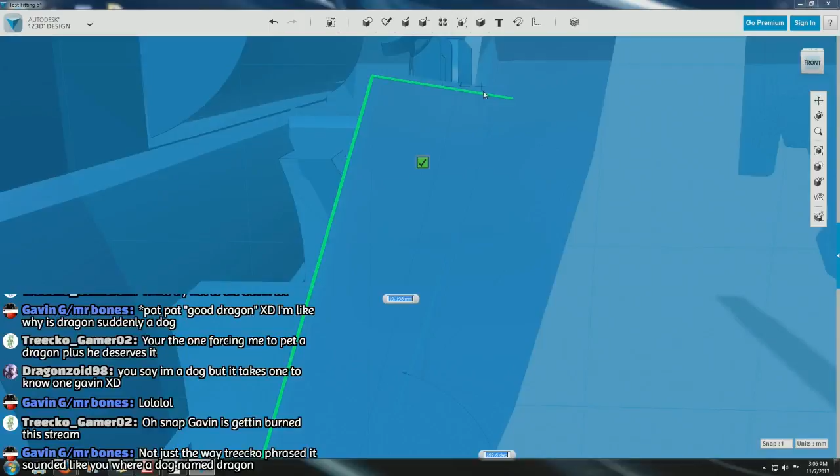Kind of sunk in there. I can't actually see where the end of that is. Do that. Did I not?

Okay, let's go ahead and save.

Oh, was new solid. Don't need this anymore.

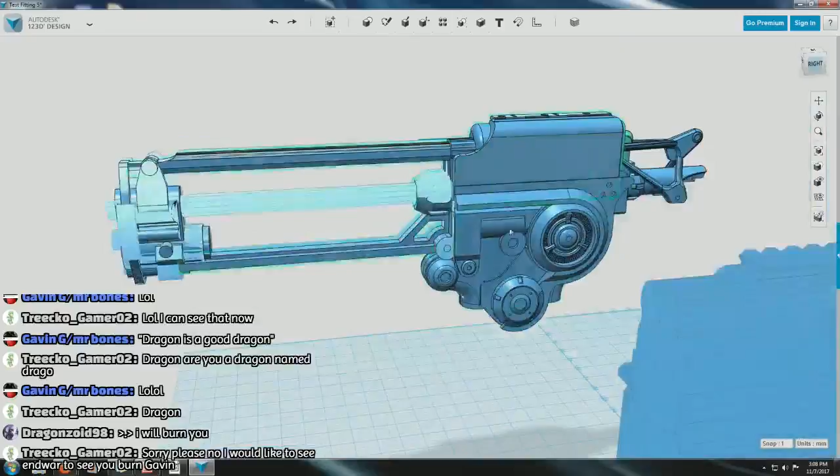Cool beans. Making progress.

This front part's definitely going to need to be 3D printed though. And when I say 3D printed, I'm talking about Shapeways.

So we actually do have the rest of the back half of this, but I split the file in half because I was starting to get some lagging issues. They seem to have cleared up now, but I was getting some serious lag issues, so I cut the file in half. The other file is right here.

Oh, so you can see the lag going on here now.

And I might cut the front end off of this, just make the two files separate. As a matter of fact, I might as well just delete this.

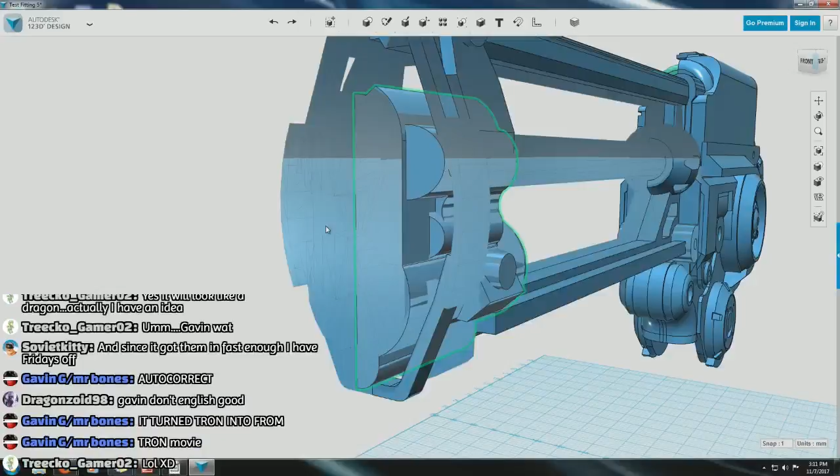Nice, Friday off is always the best. I don't care if it's autocorrect, check it before you hit enter.

Anything on the recent Tron movie? I mean, I wasn't really into the original, so I wasn't really into that one either. It was alright, but I didn't really like it. I mean, it was okay, I didn't hate it.

Wonder how much just this panel is gonna cost.

So you can see how that is gonna move back to here. Chamber the dart. It's kind of cool.

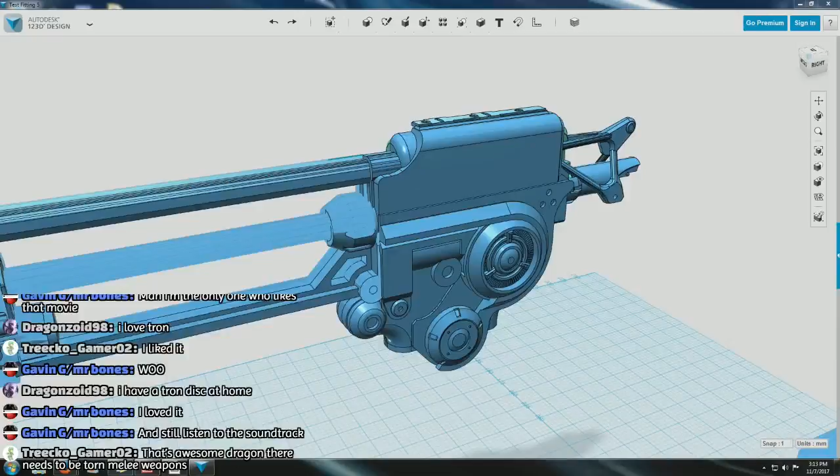Whoops. So that just about does it for this episode, I think. Starting to wind down here, I'm getting very, very tired. So if you guys have any last questions or comments, go ahead and start leaving those. I'll do my best to get around to those.

Thank you for an awesome stream. One more question though, how does an open breach system work? I have a video, if you look up HPA on my channel, I have a video explaining how it's going to work.

Ben, what's your favorite type of cookie? I mean, chocolate chip. Chocolate chip or sugar?